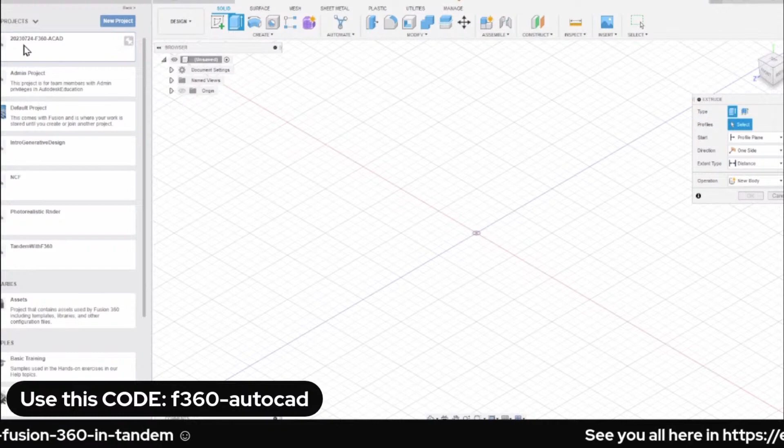So I want you to click on your data panel, this one that looks like a Rubik's Cube. So for me, I have gone ahead and created a new project, and I named this as the date today.

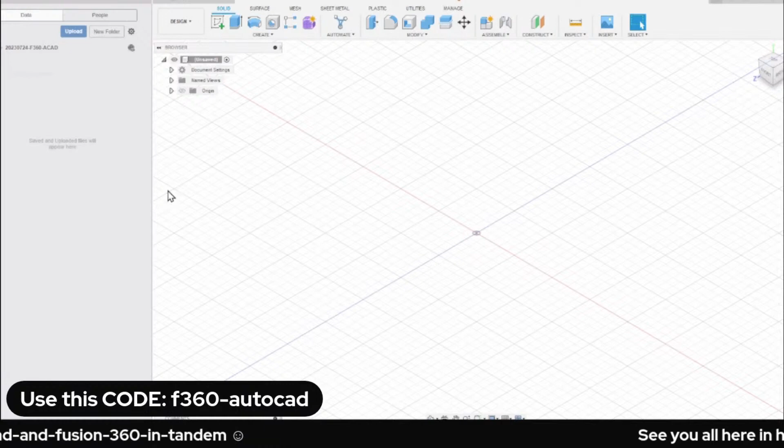Okay, and for the benefit of those who are absolute beginners, who would like to try out Fusion 360 and has the software right now running, so I'm going to minimize my data panel.

Okay, I want you to type in or key in, hit letter R. So what does it say? It's actually invoking the command which is rectangle. So right now it's currently selecting a plane or planar face. Yep, creating a sketch, definitely from James Estrada. We're about to create a sketch, Sir James.

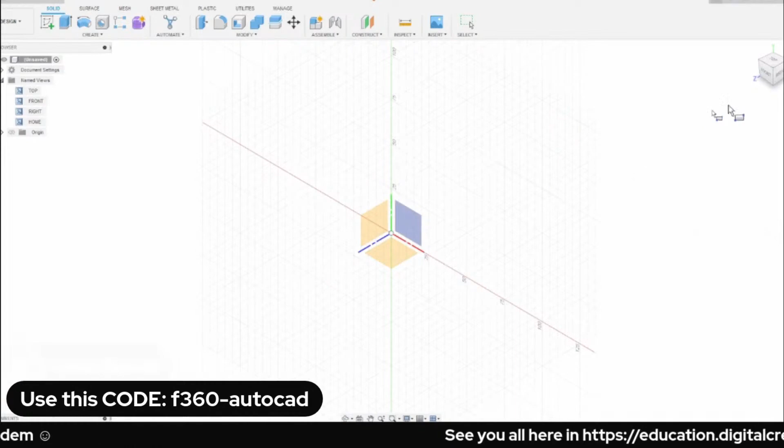So, yep, if you're familiar with the old school of doing stuff on paper, right? Consider this: in CAD, in Fusion 360, we are given three pieces of paper. And that paper is named as YX, XZ, and YZ.

So currently, besides my cursor, it is now asking what plane or planar face - in other words, it's asking us what paper do we want to draw into. So, as an example, we are prompted to select a paper, represented by YX, XZ, YZ. For me, I prefer scribbling or sketching on the XZ plane.

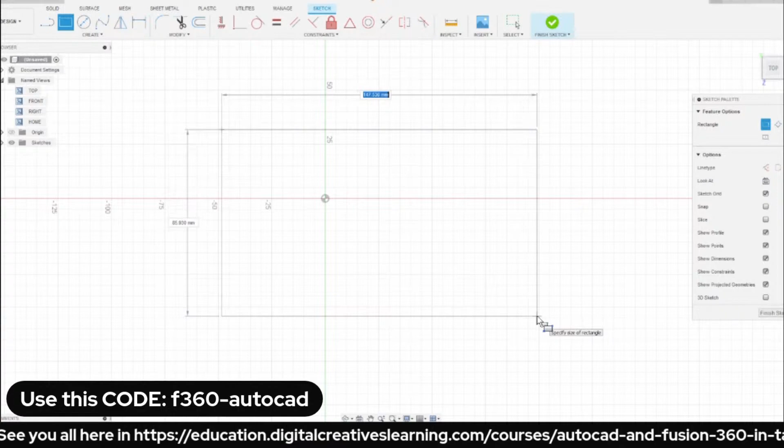And this time, we are prompted to place our first corner, right? Prompted to select or to place our first corner. So let me left click slowly. Again, this is just a recap for the benefit of those who are absolute beginners. Okay, so I just made a left click and I moved my cursor somewhere here on the lower right. I'm going to left click once more.

Hit escape to disable the rectangle command. So in AutoCAD, if you can recall, this looks like a hatched region. So again, this is also a closed boundary. So if I delete this horizontal line, notice the difference.

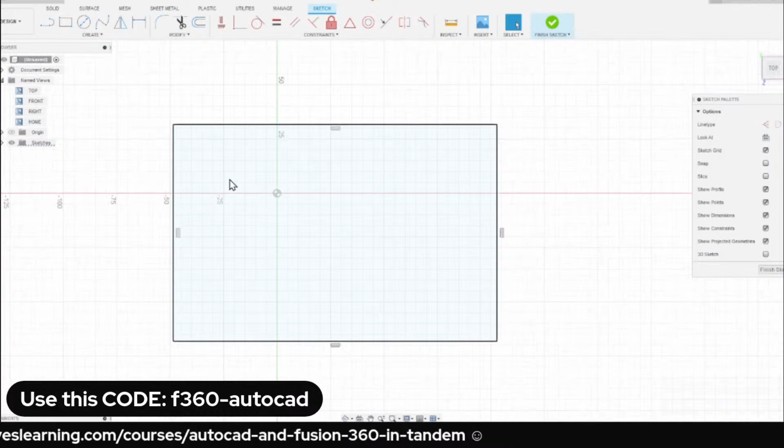Again, we're doing a recall of creating 3D objects in AutoCAD, but we're in Fusion 360. So in AutoCAD, recall that it is also converting, right? Before we can turn an entity, a closed entity, into 3D, recall in AutoCAD, we are converting it to a region, right? To a region.

So in Fusion 360, it's called a profile. So now I am launching AutoCAD as well. So again, in Fusion 360, it's called a profile. I now have a profile, and I can head over to this tiny house. A good indicator or visual cue that you're in sketch mode is you always have this green check mark, which is finish sketch.

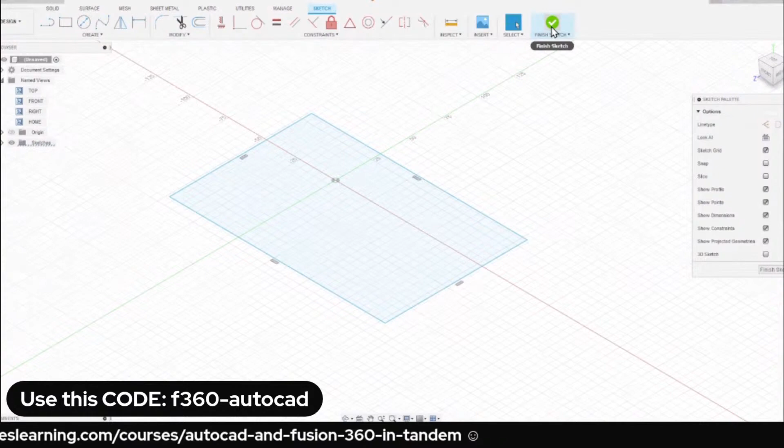So for this scenario, let's say we are done sketching. I'm going to click on Finish Sketch. And the difference with AutoCAD, notice below the command, the sketch we did is registered here in the timeline. It's also available on our browser, named Sketch 1. So I can turn off its visibility, turn off, turn on.

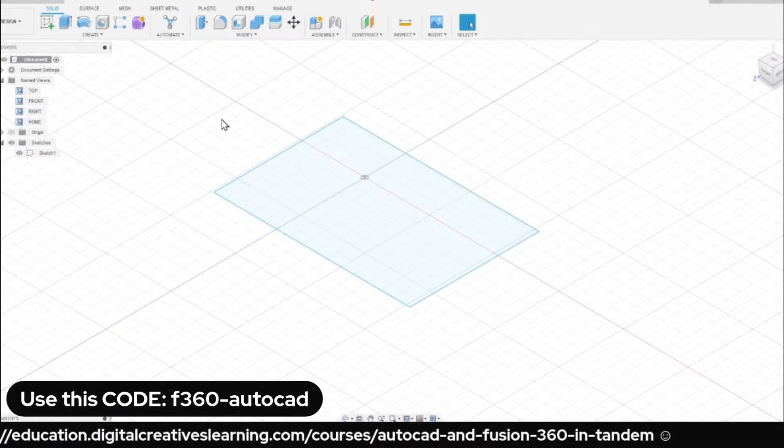Okay, so again, we now have a profile. So what can we do with the profile? We can turn this now into 3D. I want you to click on letter E. Hit letter E. The question is, what does letter E do? To our participants, what does E represent in Fusion 360? As mentioned by Sir Jose Maria Borlaza, it's extrude. So I'm now going to hit extrude, or I can head over to our ribbon under Solid.

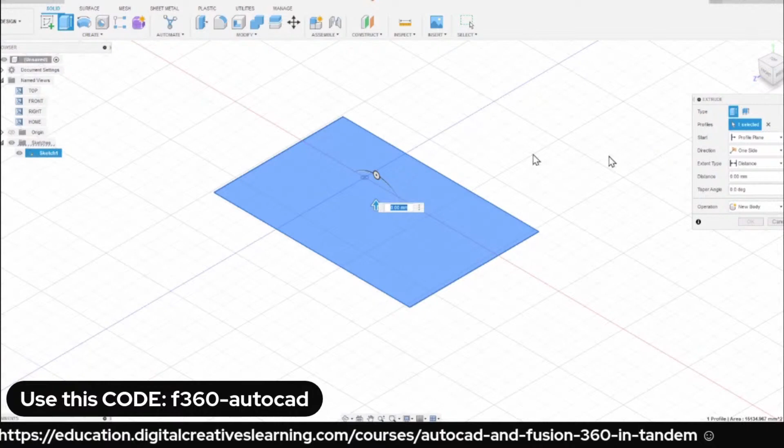Here's extrude. We are now prompted to select a profile, this one highlighted in blue. I have deselected that, so if yours is not yet selected, this is blank. I'm going to hover over this profile, left click. I now have one profile selected. I'm going to pull this up, making this now a 3D object.

Okay, selecting, okay. So the controls in Fusion 360 are the same as AutoCAD. If I hold my mouse wheel, I'm currently pressing it down, similar to AutoCAD, I'm doing a pan. Notice the change of my cursor, I'm now panning. And if I want to rotate or orbit this cube, it's simply holding Shift and holding my mouse wheel. Now I'm rotating the object.

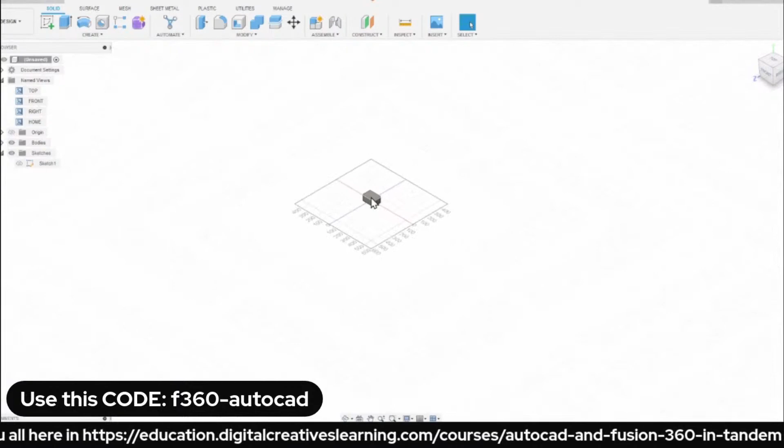If I want to go to the default isometric view, it's simply heading here on this tiny house icon. Same with rolling your scroll wheel, zooming out, zooming in, and if I zoom out and double click my mouse wheel, it goes to zoom extents. Again, same as AutoCAD. So yeah, as quick as that, we now have a 3D model, right?

So going back, let's begin opening up, like the majority of people utilizing AutoCAD mainly for 2D. 2D use, such as, notice here, I have an architecture title block, number 1.dwg. I'm going to open that in AutoCAD. So this is how it looks like.

Okay, so now I am showing you from our exercise files. I opened up Architecture Title Block 1.dwg. So again, it's utilizing AutoCAD files into Fusion 360.

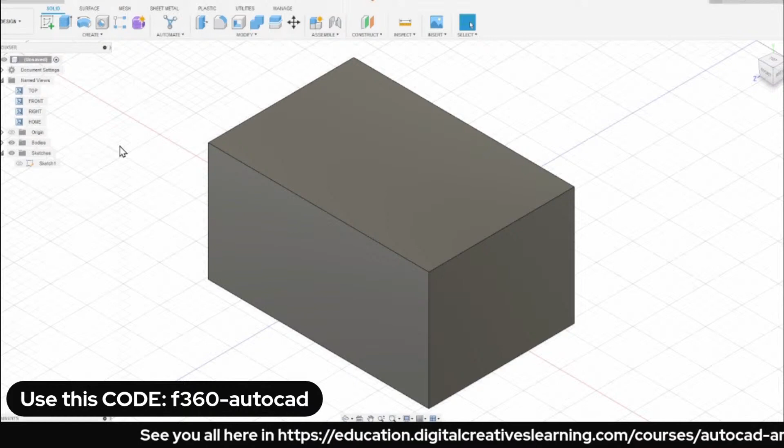With that in mind, before I head back to Fusion 360, I'm going to hover my cursor over here. Notice the location is now highlighted. I'm going to hit Control C. Once more, I have selected this path, Control C to copy. Then I'm going to open up, head back to Fusion 360. I'm going to click on Show Data Panel, the one that looks like a Rubik's Cube.

From here, I'm going to select Upload. I'm going to click Upload now. I can drag and drop, or I can hit Select Files. I'm going to hit Control V to paste that location. And I'm going to double left click, or simply click on Architecture Title Block 1, hit Open. But for me, I prefer double left clicking.

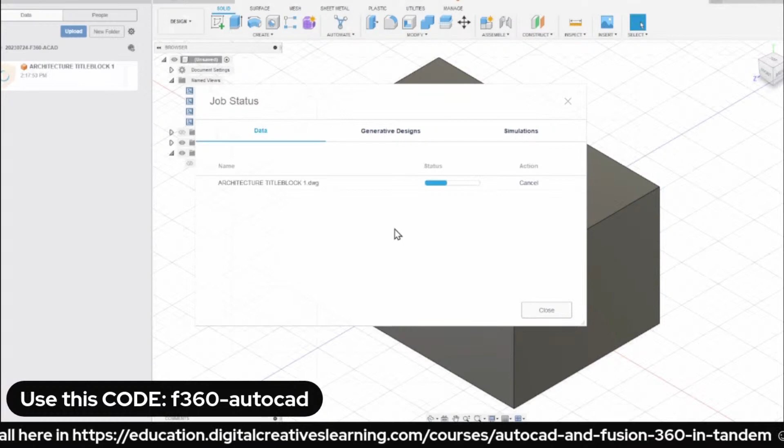We call it tick. Okay, and I'm going to select Upload. But of course, because I have created a project folder, notice the location, this may be different from yours. I'm now going to hit Upload. So it's now uploading, and from here we'll be seeing how Fusion 360 converts or interprets a .dwg file.

So it's now complete. Notice here, again, this is the file, the drawing file that we opened. Heading back to our data panel, I hope you're seeing Architecture Title Block 1. I'm going to right click, this time right click, and select Open. So it's now opening. So I actually opened another instance of Fusion 360.

While waiting for that file to be opened, the next step is I want you to open up Abyss Dining Sets by Co. So again, I have another instance of Fusion 360 open. I'm going to hit Upload, select that file, and that file is Abyss Dining Sets by Co. Tick, which means double click, tick. Okay, selecting Upload.

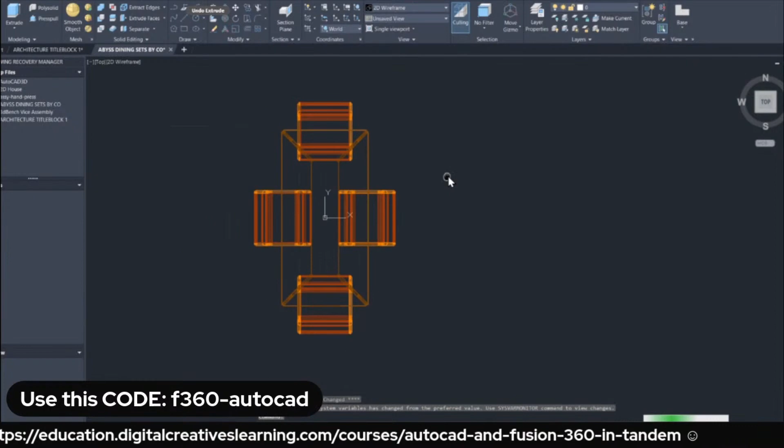Okay, I also opened that AutoCAD file in AutoCAD. That DWG file is also now opened in AutoCAD. So let me orbit this around, change the visual style to hidden, or how about conceptual? So yep, initially we opened up a 2D DWG file in AutoCAD. Right now I opened up, again, the file named Abyss Dining Sets by Co. So this one is a 3D object made in AutoCAD, and recall, I imported that into Fusion 360.

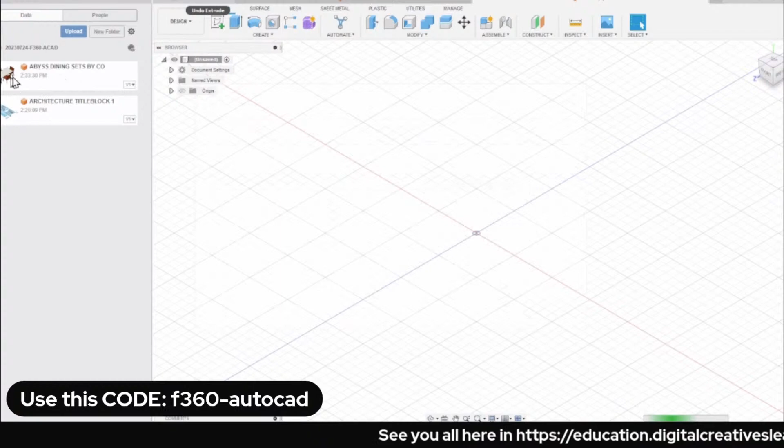I'm now going to hit close. Notice here on the left side, on our project panel, I can now see Abyss Dining Sets by Co. I'm going to right click now, select Open.

So now I simply minimized our data panel again, and from here you can now see how Fusion 360 translated and imported that AutoCAD file. So again, this is showing you that whatever you have made in AutoCAD is all reusable in Fusion 360. This is actually the goal of this live training, for you to appreciate how we can work with AutoCAD files in Fusion 360.

In addition to that, if I bring in a different file, notice here in Fusion 360 I can conduct simulation. I can do manufacturing, program this into CNC and have this manufactured. I can generate the tool path.

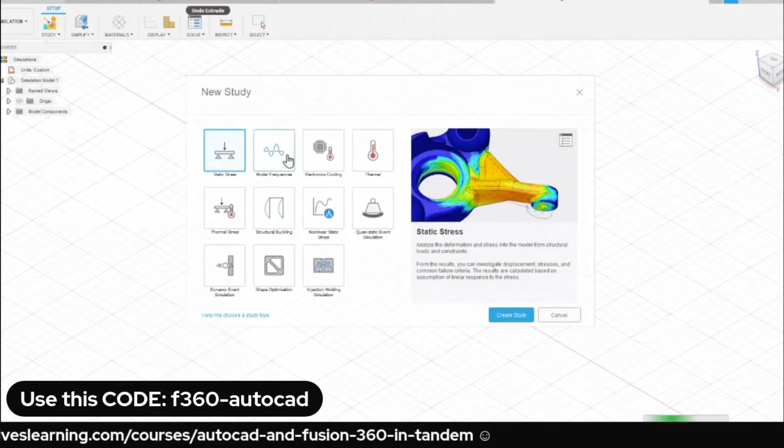So like for this one, for simulation, Fusion 360 is very, very powerful, unlike AutoCAD. Notice here, if that AutoCAD file was a beam, I can conduct a static stress analysis. I can do modal frequency. I can do electronics, cooling, thermals. I can do structural buckling, thermal stress. For those who were given access to Fusion 360 right now, I'm hoping you get to appreciate the power of this software.

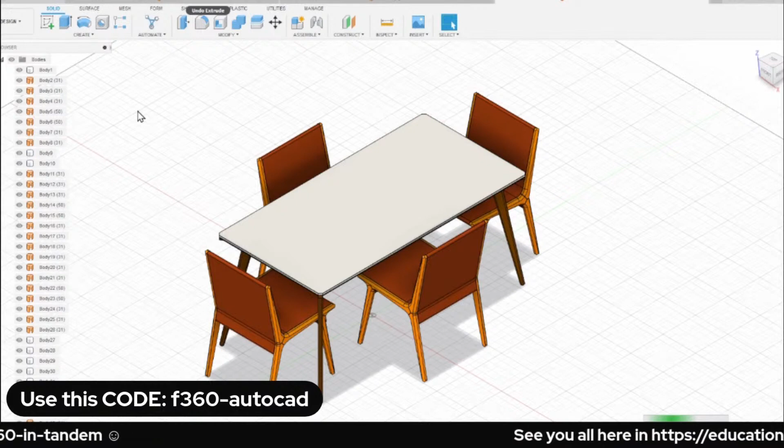So again, we now have that table and chairs in Fusion 360. Next step, I'm going to expand bodies. So informing you that this type of icon is a solid body, and this is a surface body. I hope everyone has downloaded and opened up this file, so feel free to tinker around.

Notice as well, in comparison to the cube that we created earlier, recall it has a timeline. When I say timeline, it is where the features, the commands, are registered. Like here, recall that after doing a sketch, we created an extrusion, so it's all registered here below on the timeline.

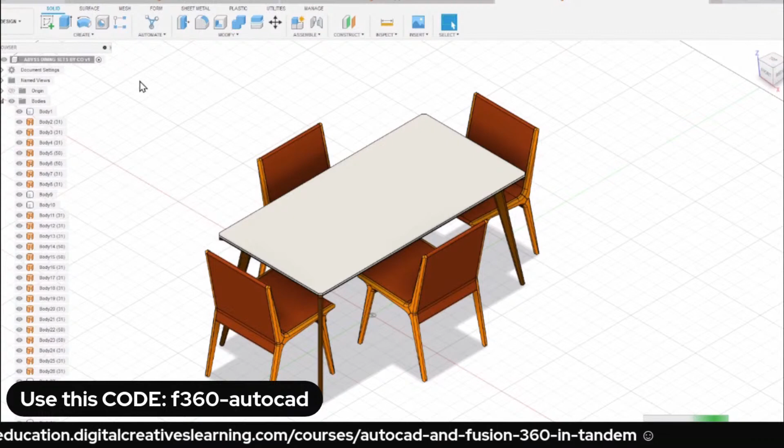So going back to the other instance of Fusion 360 with the Abyss table and chairs, notice here it's not available. And a good practice, please do, let me reiterate, keep this in mind: if you imported something and the timeline is not available, the next step would be heading over to our main file in the hierarchy. I'm going to right-click this and select Capture Design History.

So encouraging everyone, once more, with the Abyss Dining Set opened up in Fusion 360, I want you to head over to the main file, right-click, and select Capture Design History.

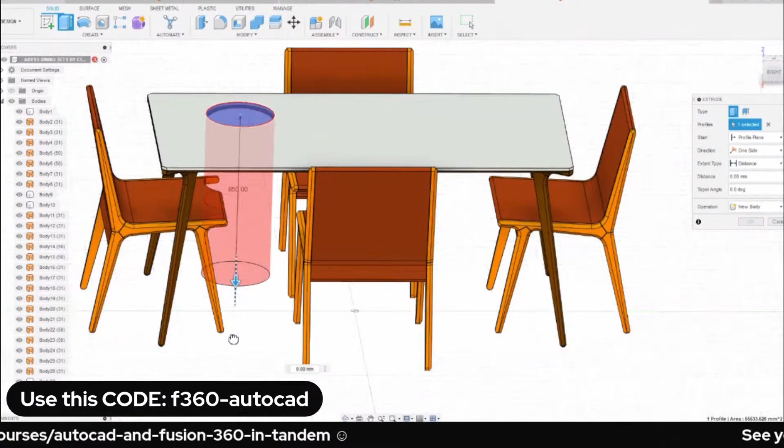So right now, if I create another hole, I'm going to sketch on this table's surface, hit E for extrude, selecting that profile, pulling this arrow down, selecting OK. Notice below, now the sketch and that extrusion command was captured. So I can quickly delete or undo this command by selecting them both, holding Control and left click, hitting delete on my keyboard.

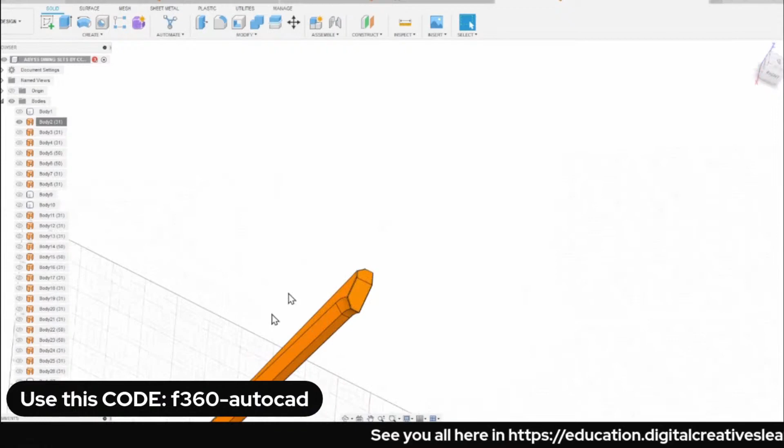In addition, we can isolate things. Like for this one, I can select the leg of this chair, which is body 231. I can right-click on this, head to the bottom, and select isolate. So again, this is a surface body. I can create a window selection, same as in AutoCAD, to select it all. Head over to surface, so let's check if stitching this up would make this into a solid body.

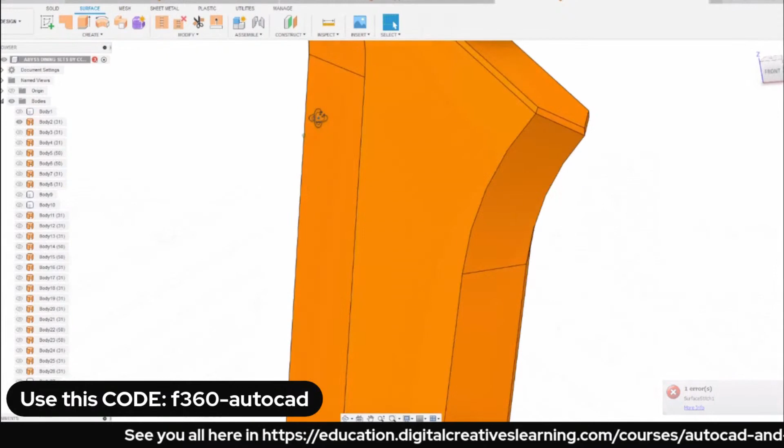So selecting stitch. It's looking nice, I'm seeing a green color. Take note, this is currently a surface, we're going to convert this hopefully into a body. Selecting OK. So the challenge here is it doesn't work. The challenge here is, of course, re-editing this surface, closing this up watertight for the stitch to convert this into a solid body.

So how about raising up the tolerance, let's say, to 0.2? Still doesn't work. How about 0.5? So I'm showing you some of the challenges when converting a surface body into a solid body. But of course, this is still reusable. So to enable the visibility of them all, I can right-click on the bodies folder and select Show All.

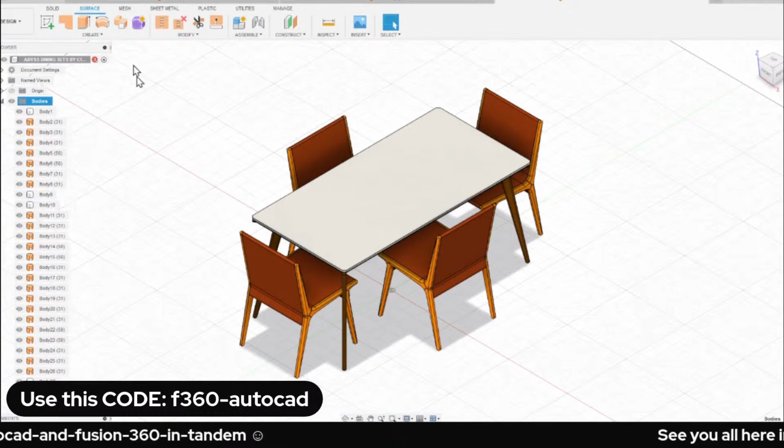Okay, another thing that we can do is I'm going to head over to Change Workspace. I want you to click on this dropdown and head over to Render.

Okay, this is one of the great advantages of Fusion 360. It has a very good render engine. We have the option to do a local render, or we can do a cloud render, which passes that computing power to the cloud.

So how about I hit A, which is the shortcut for appearance. And I'm going to head over to wood, so now we are about to customize the appearance of this object in Fusion 360. Let me try downloading mahogany or pine. How about pine? Let me download pine.

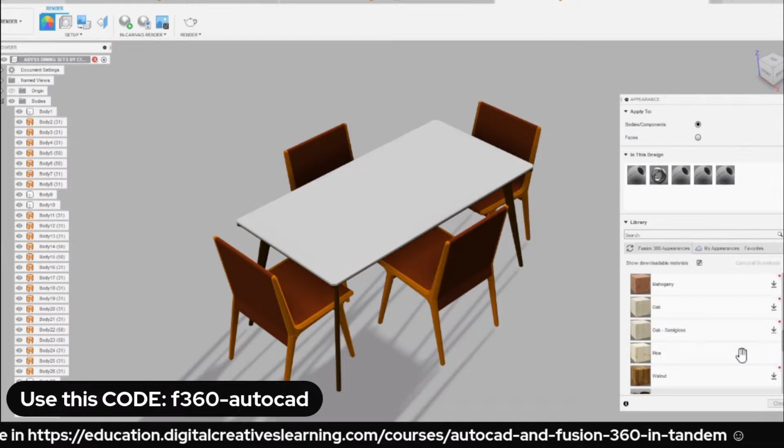Notice on the top it says apply to. We have two options: applying this into a body - again, this tabletop named as Body 1 - or we have the option to simply select a target face.

So let's check the difference. Let's say for faces, again letter A for appearance, enabling faces. I'm going to zoom in and drag and drop - left click and hold - and drop it on this surface, on this face.

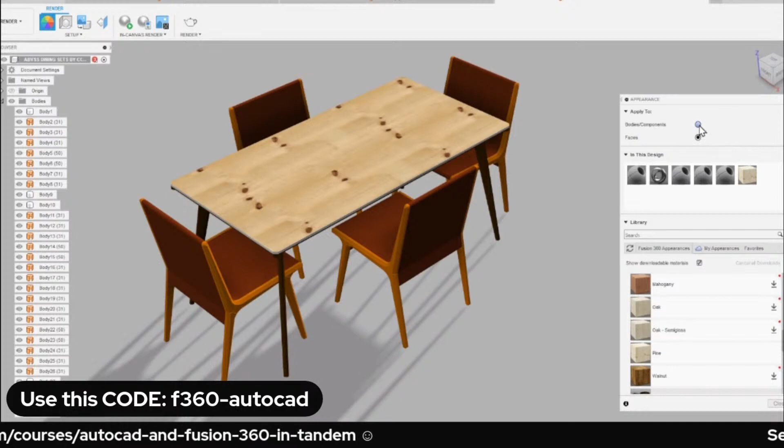Notice the difference - it was simply applied on this target face. So if we prefer having this on the whole body itself, I'm going to tick or enable bodies components, heading back to Pine, left click and hold, drag and drop over here, or heading over to our browser, dropping this to our Body 1, and selecting remove. If I zoom in, it's now applied to the whole body.

So in addition, of course, when you import and that results in tons of bodies or components, you can get organized by simply, let's say for Body 1, I can rename this - left click once more - let's name this as tabletop.

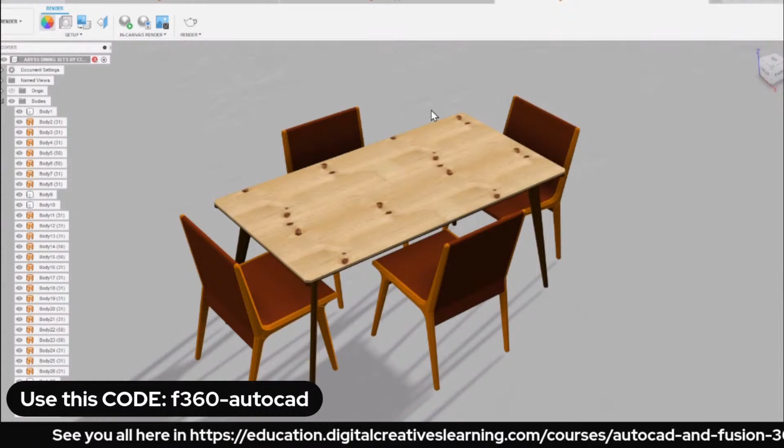Okay, I can head over to appearance once more, head over to in this design, Pine. I can right click on this, select edit. Let's say the scale is too much or too low. So notice here, I can adjust the settings, making this proportional. Selecting done.

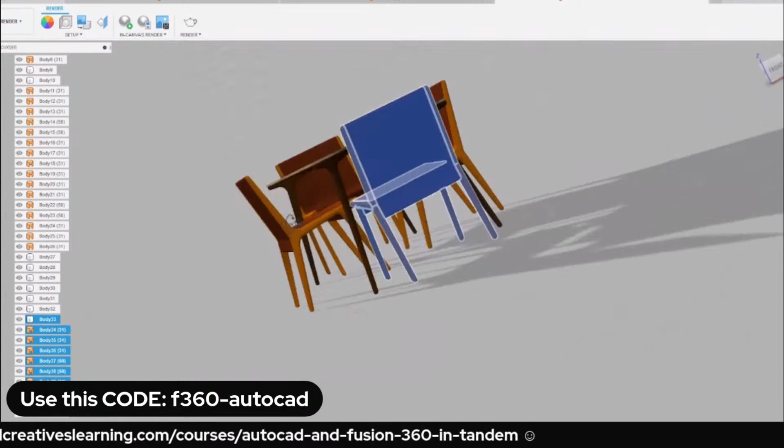Okay, so let's say, how about customizing the fabric of this chair. I'm going to select this face, right click, let's locate this on our browser. So this is a body - I am seeing up to here is the whole chair.

So with this bodies and surfaces selected, I can right click, let's isolate this, and how about customizing this chair's appearance. Heading over to our view cube, I can hit letter A for appearance - how about walnut? Let's try to change the appearance of this surface, which is in color orange.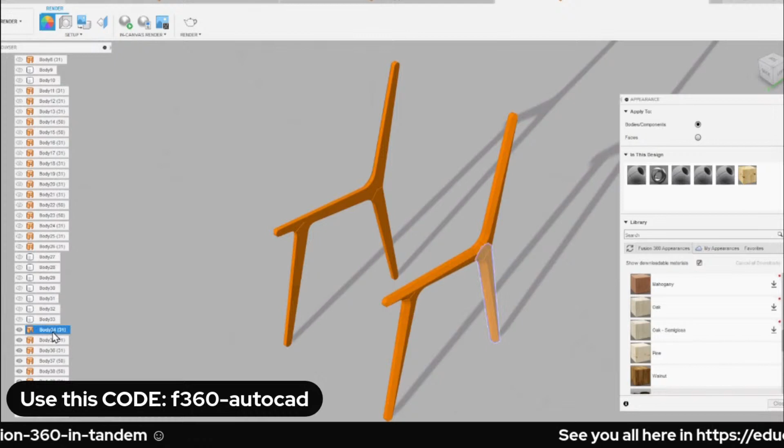Into a walnut type. So the body is - again, so this is the body. I'm going to turn off that body, hit A for appearance, and let's select all of this surface. Let's check what will happen if I change the appearance of a surface.

So drag and drop - of course, I can definitely drag and drop it individually on this surface, but right now I have all of this surface body selected. Drag and drop, left click and hold once more, I'm still holding my left mouse button, release. So it's now a walnut, but definitely darker.

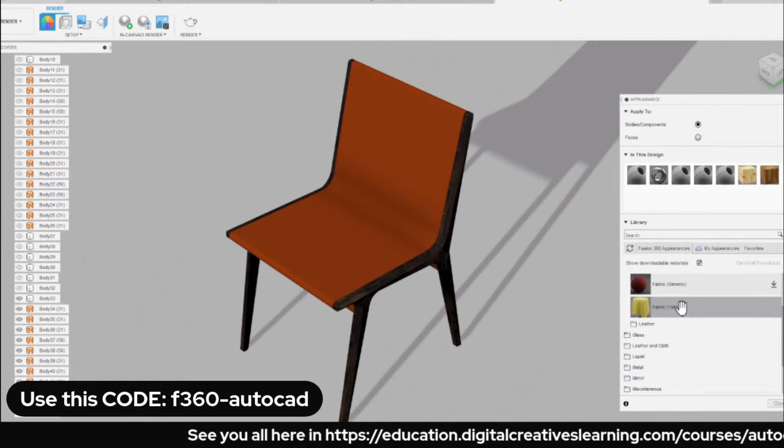So turning on Body 33, how about customizing this solid body? I can head over to fabric - oh yes, we have a fabric here. Let's say I prefer a yellow fabric. So that fabric downloaded, let's apply to - I'm going to enable bodies components, apply to Body 33. So there you go, we have now customized the appearance of this chair. Hitting close.

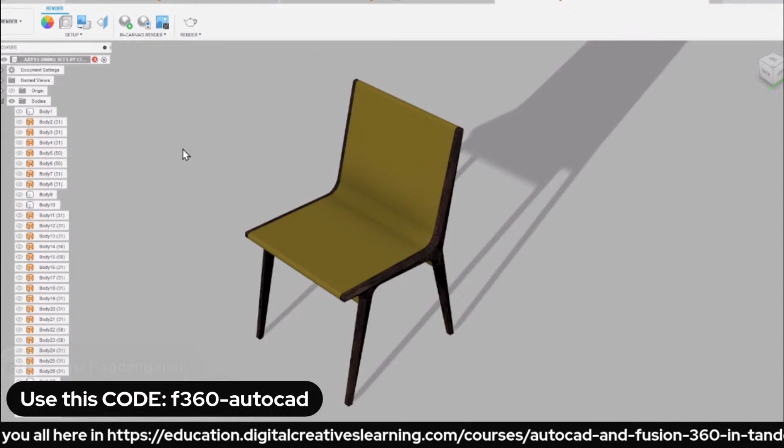Okay, heading back to bodies, or let us do a quick render of this chair. Let's now tinker around with the rendering capability of Fusion 360, and try to turn this chair into a realistic product render. So we have now customized the appearance - again, this all came from an AutoCAD file, a 3D AutoCAD file.

In addition to that, I can change the background. To do that, I'm going to Scene Settings, head over to Environment Library. Let's say I prefer a dry lake bed, so I'm going to left click and hold, drag and drop here on the blank canvas, and release. Notice the change of the scene.

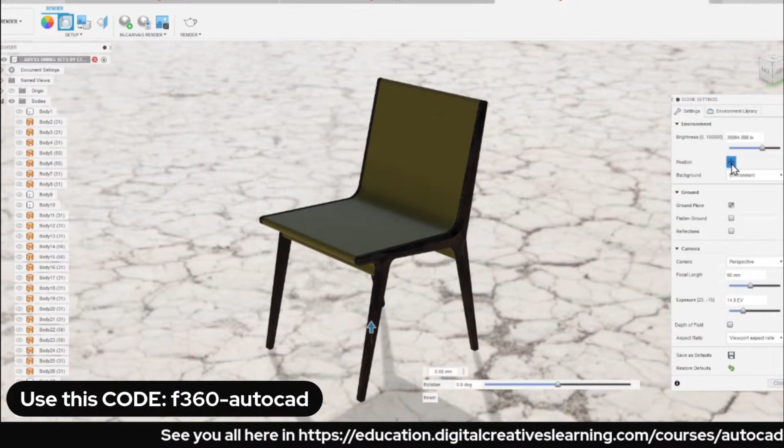To see that dry lake bed, we need to head back to Settings tab, under background, I want you to select environment. So this is the environment we're now in. In addition to that, I can change position, I can rotate so that the shadow goes over at somewhere around 140 degrees. So hitting close.

Of course, definitely we can scale up as well the ground. So I'm going to head back to scene settings, select position once more. I can do a reset, I can also flatten the ground, and by flattening the ground we can now rescale it, make it much smaller. How about this type? This looks more proportional. I'm going to hit close.

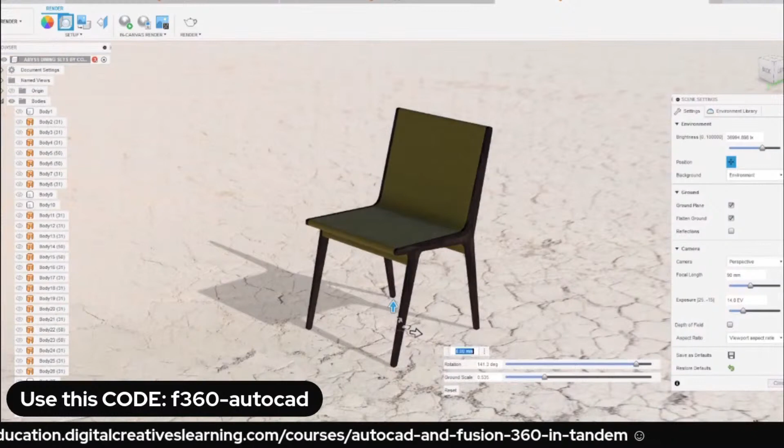Okay, and from here again, you have the opportunity to do a cloud render. For cloud rendering, it uses cloud credits - now for me I have around 100,000, but if you have consumed such cloud credits, you can purchase it again from Autodesk. Okay, so I think I have a good machine, I prefer doing the local render. So let's click on in-canvas render.

Notice below on the lower right, I can select this indicator or slider. I can move this to final or do an infinite render. Let's do an infinite render, and from here my machine is now working its way through the computations, the bounces of the photons.

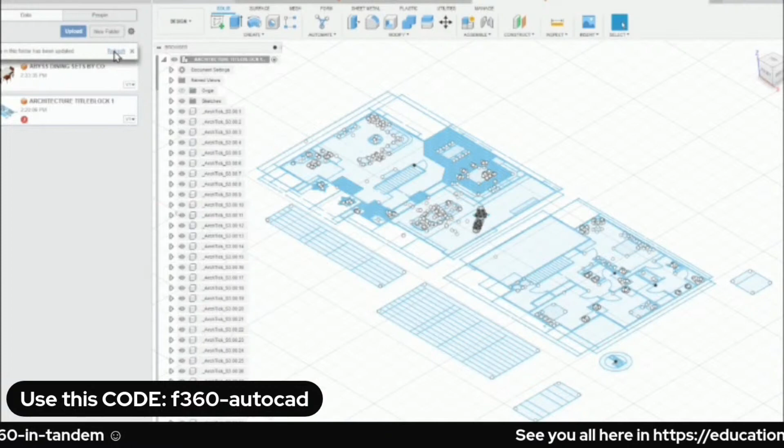I headed back to our first instance of Fusion 360, where we opened up a 2D drawing. I'm going to close our data panel. So this is the output, the outcome, the interpretation of this AutoCAD file in Fusion 360.

So from here, notice about going into this area. Notice here we're seeing profiles. Again, when we say profile, definitely we can do an extrusion, right?

So from here, as an example, but before we do such extrusion, I'll head back to our main file. I'm going to right click here and select Capture Design History.

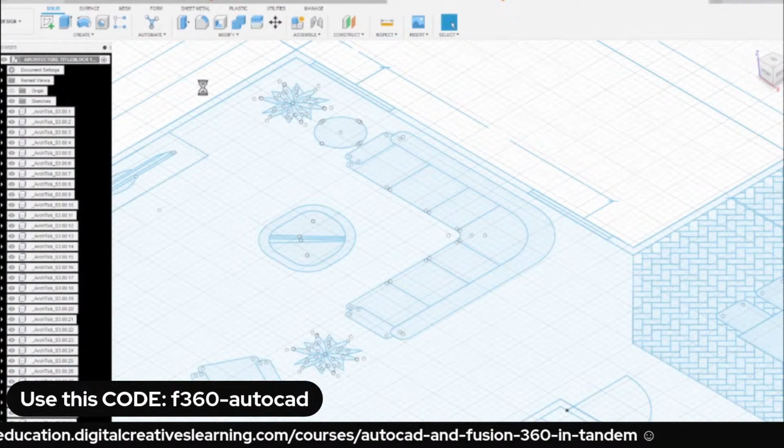Okay, while waiting for that, let's head back to our render.

So from this scene, the realization on this exercise file is definitely that this is a large file. But of course, you may probably have your own simple 2D AutoCAD file, 2D drawing.

Okay, going back to our render, of course, you have the option to quickly save this or wait until it goes final. So let's not wait, but of course we will get back on this design. For now, let's capture this.

Let's download this image. I'm going to select Capture Image. Okay, the resolution would be the whole window size. I'm going to hit OK. And I have options.

I'm going to save this locally as well, so I'm going to copy my target location. It's on the exercise files. Under save to my computer, it's currently ticked. Heading over to this locate or ellipsis, Control V. I'm going to agree with this default file name, selecting save.

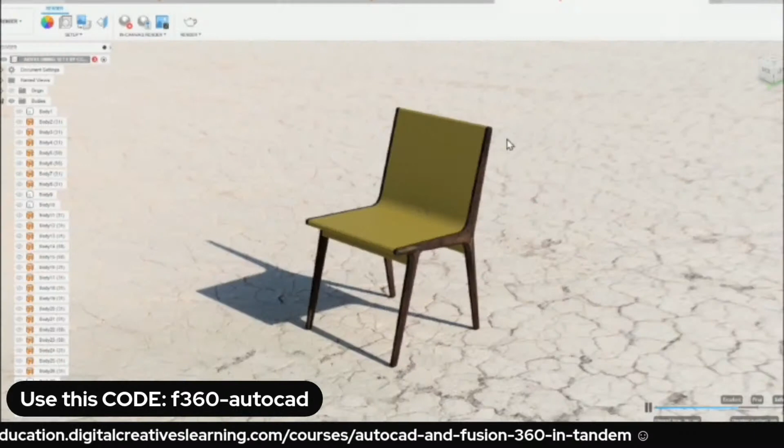So going back, I'm going to head over to our data panel. Notice I have resized that window. Because I accidentally resized that window, the render was reset.

So it's again starting, going back. So it goes back, re-rendering this whole scene.

Okay, moving forward, let's discover another way of working with AutoCAD 3D files. I'm going to hit upload, select files, and this time we're going to select the 3D bench vice assembly.

Okay, double left click and select upload. So we now have the 3D bench vice assembly dwg opened.

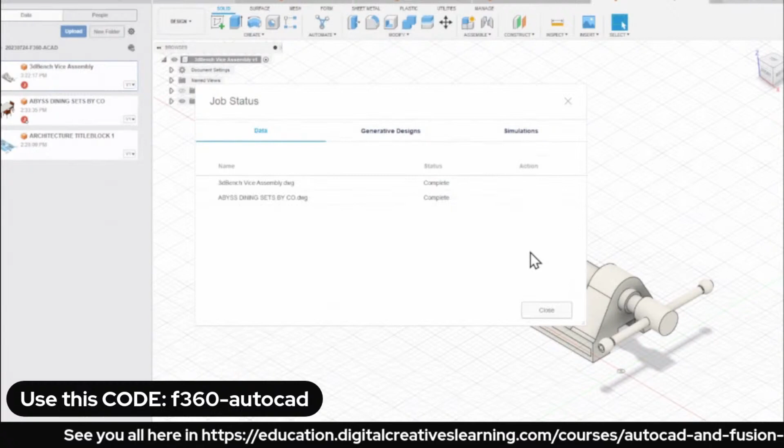Okay, so I'm now going to hit close. This is that AutoCAD 3D file opened up in Fusion 360, and let me show you how it looks in AutoCAD. Changing the visual style to conceptual. Okay, so this is what we are currently working on or about to work on.

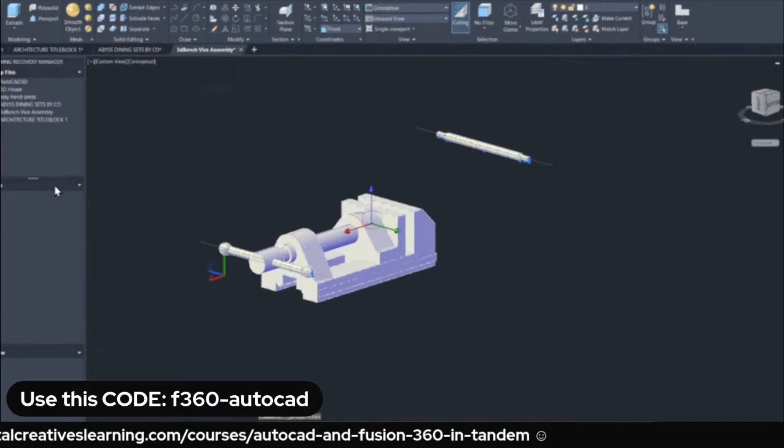And if I can do a properties, we actually have three solid bodies here in this AutoCAD file. Okay, so this would be your final exam to get a hold of that course completion certificate.

So again, the first thing we have to do is recall the importance of having the timeline, or the actions that we did, recorded. So again, right-clicking on that upper or main hierarchy, selecting Capture Design History. So if I twirl this down, same as what we have seen in AutoCAD with those bodies, I have 1, 2, 3, 4, 5, 6 solid bodies.

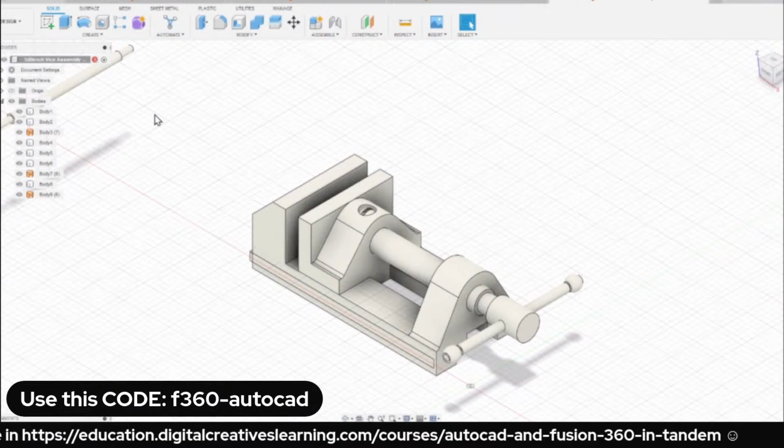Okay, so the goal in this part of our training is to turn this into a dynamic assembly. We have to see how it looks like when making such parts move and how it affects the other parts.

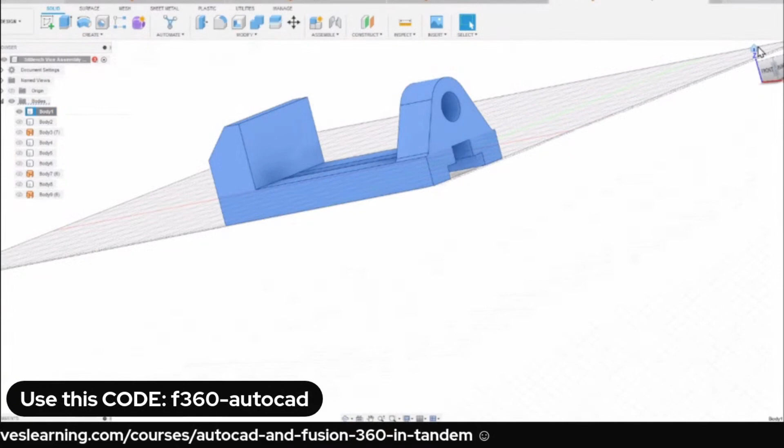So a good tip when importing components or bodies into Fusion 360 for an assembly is to locate what is supposed to be the parent component. From what I am seeing here, this is body 1. Let me isolate this. I prefer this one should be resting on these two plates.

And that two plates, I'm going to select this face, right click, find in browser. Oh, I'm sorry, that two plates is body 4 and body 5. So make it a habit to identify the parent component.

Because what we're about to do is to remove the degrees of freedom of certain parts or components. So this is currently a body. Now for us to have this as an assembly, we have to convert this body into a component. In some other softwares it's called parts - to those familiar with SolidWorks, I think it's called SLDPRT, that's a part. In Fusion 360, it's called a component.

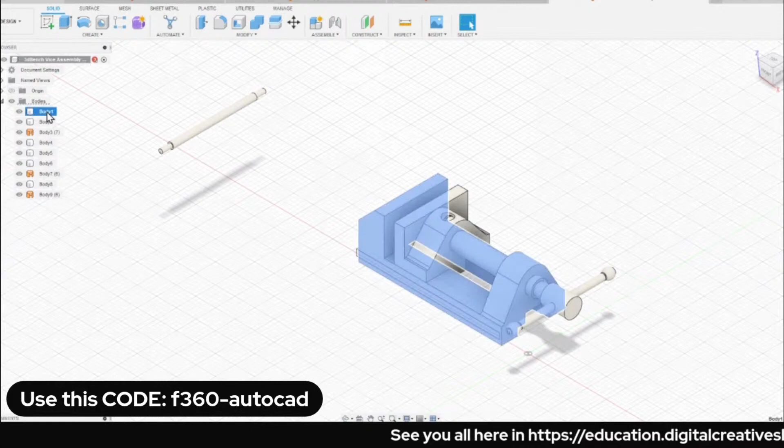So I'm going to select body 1, holding shift, body 9, to select all of these bodies. I'm going to right click and create components from bodies.

So if this is now a component, a part, this is now free moving. I'm currently moving or tinkering with component 3.

Okay, so let's relocate that parent assembly. I consider this as the parent components, which is 7 and 8. Or we can also consider this component 1 as the parent component itself. So it depends on you - I think it's much better if we have component 1 as the parent.

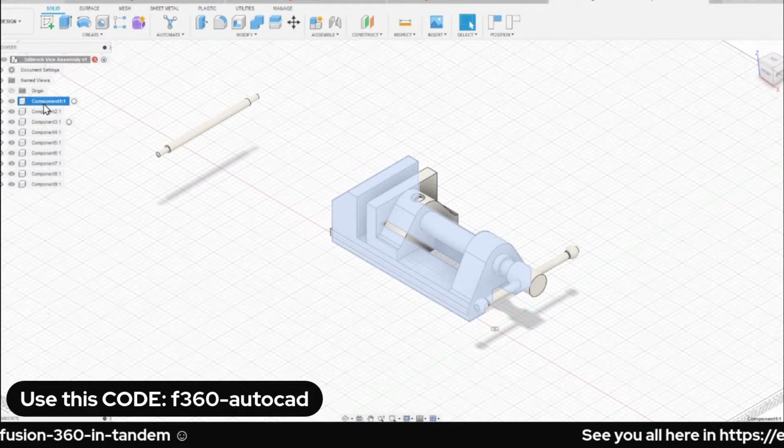So I'm going to hit component 1, right click, and select ground. When we say ground, it's removing its degrees of freedom, so I'm not able to move this body anymore. Notice, once grounded, I can still move these other parts - moving them out.

So again, what we're seeing here is an AutoCAD 3D file imported into Fusion 360.

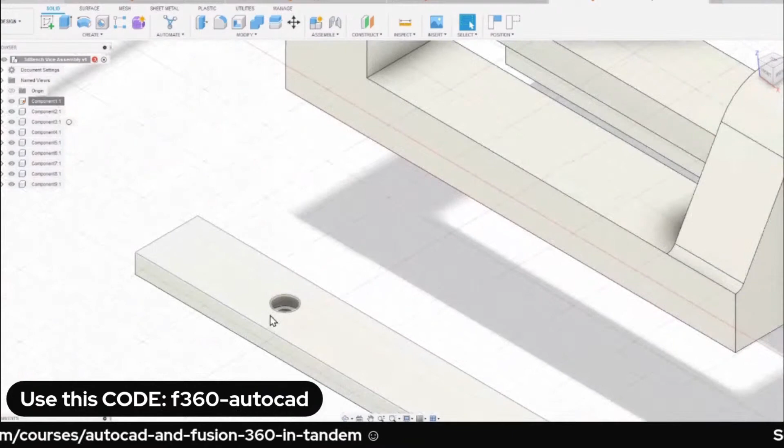So the first thing I am seeing is, let's say we have to assemble this going inside, or the face of this plate going to this face of this vise. So I'm seeing if there's a hole there, it may probably be secured rigidly by a screw. So I'm going up, selecting assemble, selecting joint. And I'm seeing a countersink or a screw with a head.

So with that, we can also rotate this component - this is component 7. I'm going to hit M for move, select this rotate handle, selecting OK. I can right click once more and repeat that move copy command, selecting this component. Okay, let's rotate this. Selecting OK.

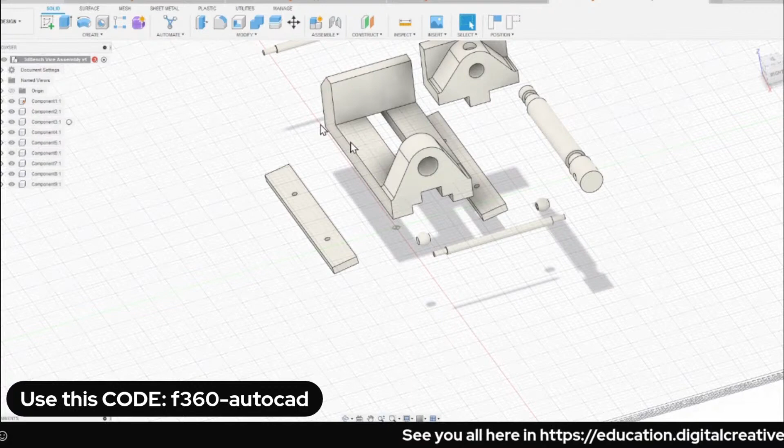And now let's apply joints, hitting J for joint, heading over to the motion tab. So what I'm seeing here, it is possibly a rigid joint because there's going to be a screw here that will also go there. And next we have to define the target motion, which is rigid.

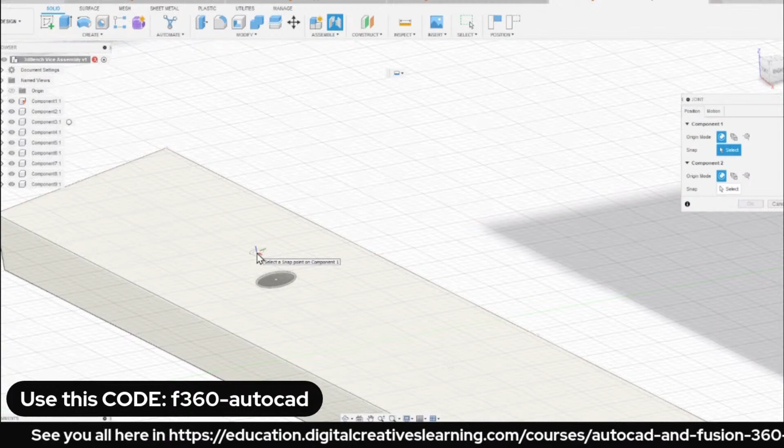I'm going to head over to position. Notice here there's this disc shape which is also being represented by an axis - we have the Z there in blue, the green, and the X in red. So this is the snap point. Now this plays an important role because when we define what the snap point is, it will mate with that other snap point.

So to understand this more, I'm going to define our joint origin snap point, otherwise called joint origin. Notice if I hover over here, we're highlighting the cylindrical face. If I hold control, notice, and move my cursor out, it means that we are locked on this face. But if I release my control key, I can now hover over and highlight other faces where my cursor is. So my target here is this face. I'm going to hold control and left click.

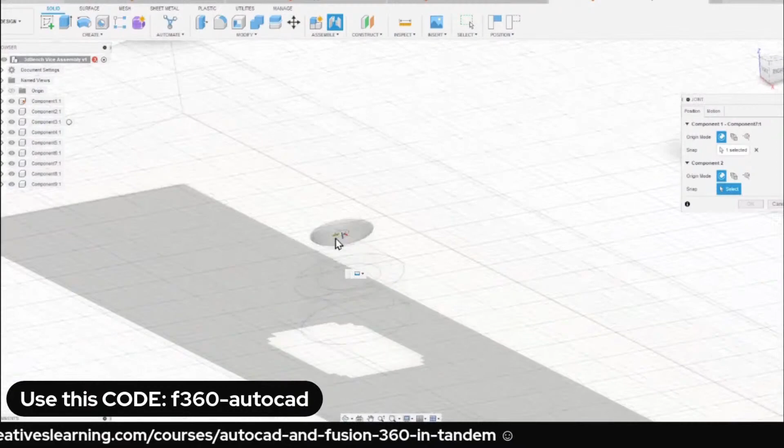So joint origin defined. I will go back to this component, rotate this, and select this joint origin. Notice what will happen - the joint origin from our first component will mate with this joint origin of component 2. So I'm now going to hit left click. Okay, so it goes in there. Selecting OK. If I hover over this face and try to move, of course, because it's rigid, rigid is same as being grounded.

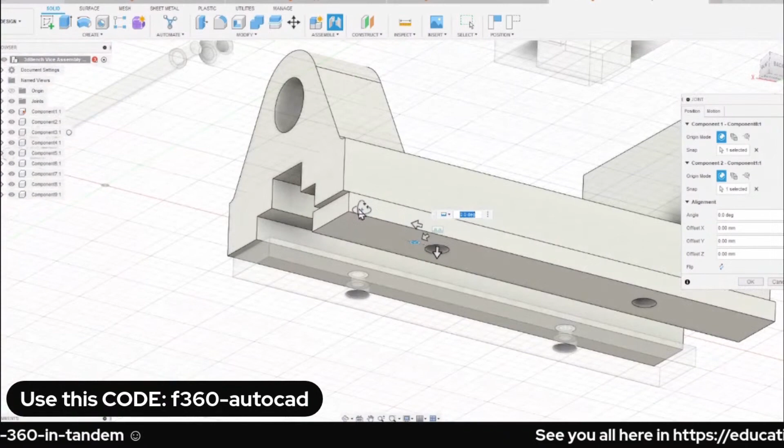Next, how about this one? Let's try defining the joint origin here, hitting J, the shortcut for Assemble, Joint. So left click that joint origin and left click on that joint origin. Selecting OK.

Next, of course, definitely this shaft should go in here, right? So the appropriate joint for that - let me ask our participants, what do you think is the appropriate motion type for this shaft to go in here? Is it rigid? Is it revolute? Is it slide? Is it cylindrical? Is it pin slot? Is it planar? Is it ball? What do you think?

Yeah, asking our participants, revolute? Yes, it's also possible, revolute.

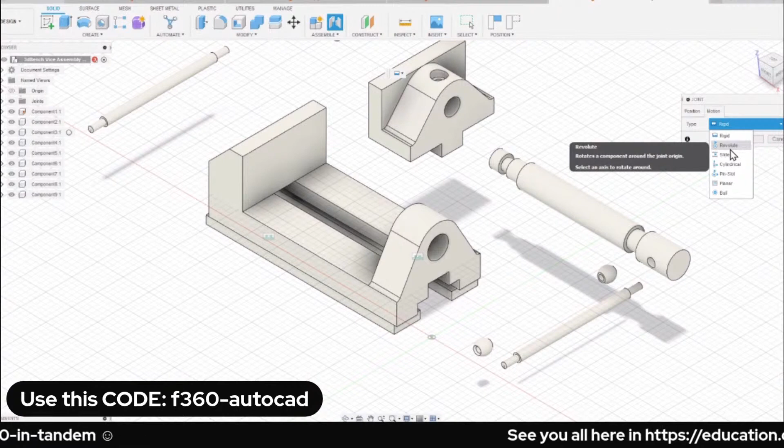So if we insert this, let's say this is a shaft, insert this, of course definitely it will revolve, it will spin, but there's another set of motion with respect to the x-axis. It will move back and forth, right? So it's not only revolute.

So it will not only be having a revolute, but it will also have a linear action with respect to the x-axis. So the appropriate joint for that is actually cylindrical. It gives the opportunity to rotate, to revolve, and to move back and forth.

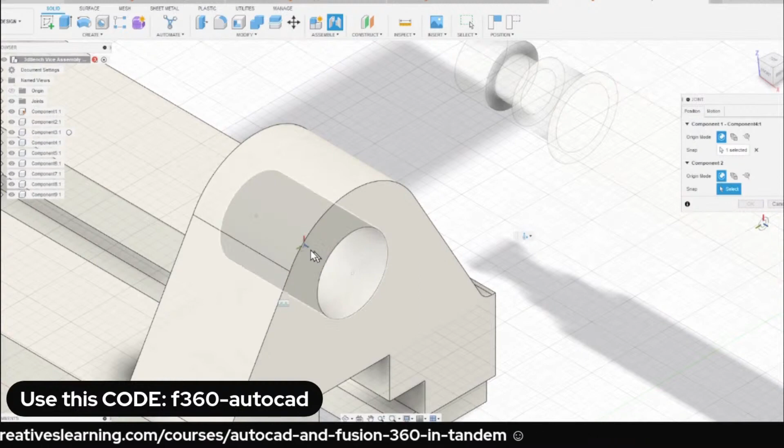So having the type as cylindrical, getting over to position, I prefer any of these joint origins will do, but I prefer this joint origin over here. Left click, heading over to this face, holding control just to lock it on this cylindrical face, and left click.

Selecting OK. Notice, yep, I can spin this around and move this back and forth. So we're now creating a dynamic assembly. Can you do that in AutoCAD? The question is, can you do that too in AutoCAD? It's different here.

There's tons of things that we can do with an AutoCAD file imported into Fusion 360. We can do motion study, we can assign or drive joints, we can do motion links. So moving back, we have now inserted the shaft or rod into that hole. So this as well is our next target.

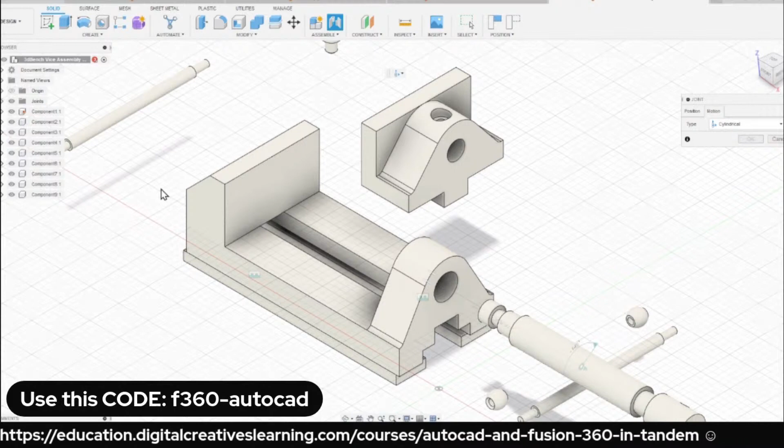Okay, so what do you think, guys? What should be the appropriate motion for this component to go over to this component? Another question, what do you think should be the appropriate motion for this component to go over here?

Yes, Sir James is correct, linear with respect to the shaft. So for that linear motion, it's actually called slider in Fusion 360. So with slider, I will go over on this edge.

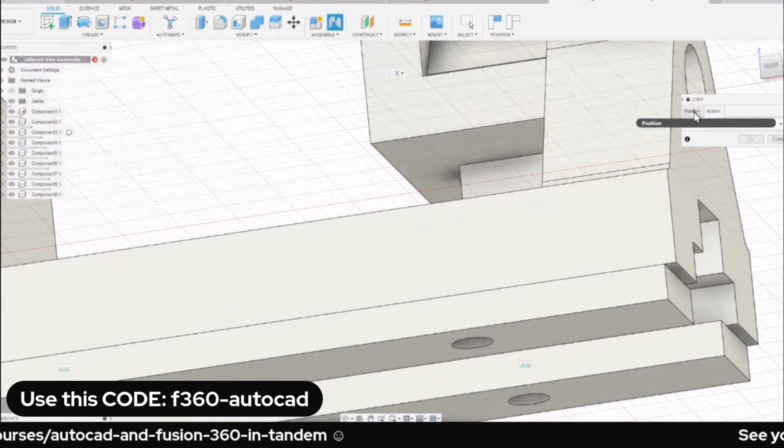But of course, heading over to position tab, again take note of the joint origin or this disk's position. So I'm going to head over to that edge.

If these other components are bothering my view, this is component 9 and component 1. I have selected them both, right click, and I'm going to isolate them both, for me to have a clearer view.

Hitting J, motion type slider. Again heading back to position, so notice the position of that joint origin. The red axis, x-axis pointing up, the green pointing to the right.

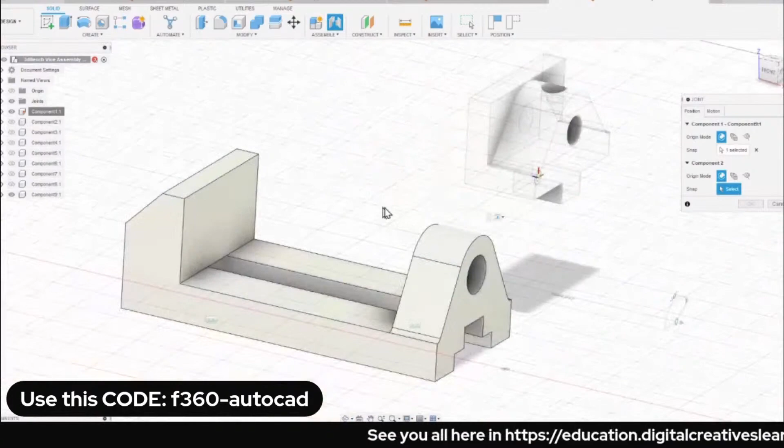Okay, so with that I'm going to the other component. Here, notice again the orientation of our joint origin. Left click, and hit OK. So now we're having a linear motion like what Sir James Estrada mentioned earlier.

Okay, going back, heading to 3dBench Vice Assembly. Let's show all components.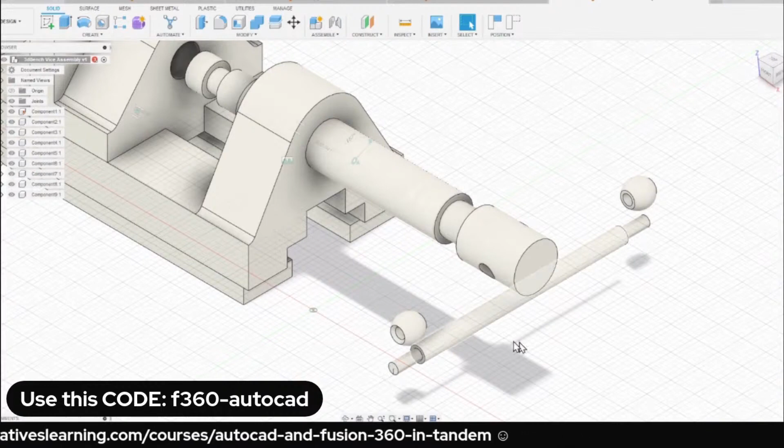Next step, how about having this rod be inserted on this hole? Again, it's the same, hitting J. Motion type for that would be cylindrical.

Heading to position, selecting this joint origin, heading over to this cylindrical face, holding control just to lock on this face, and selecting this joint origin. Selecting OK.

So hoping you are following along because this would be our final exam. I want you to recreate what I did. So next step is to have these end pieces.

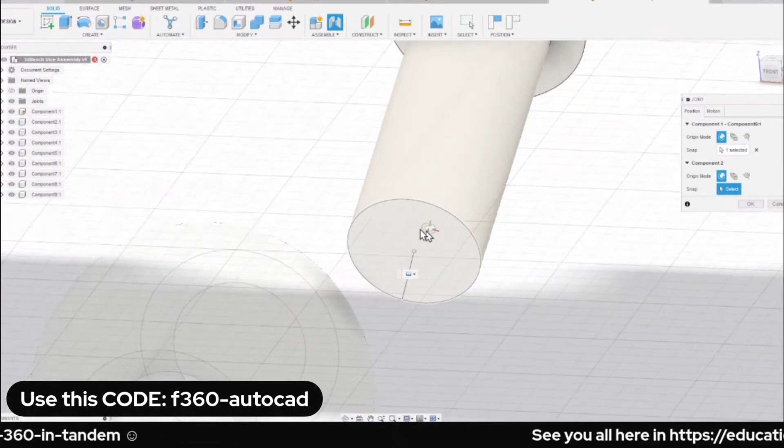Let me hit J, I think the appropriate one for this is rigid. Heading back to position again, hover over this edge, hold control, selecting this joint origin, and hovering over this face, holding control just to make sure, and selecting this joint origin. Left click.

Selecting OK. Let's check. Yep, looks nice, I can now rotate this.

Yep, in addition, for demonstration purposes, I can also, let's say, go to front view. Right, so I think this face should be mated with this face. So the appropriate motion type for this one, I think, would be revolute.

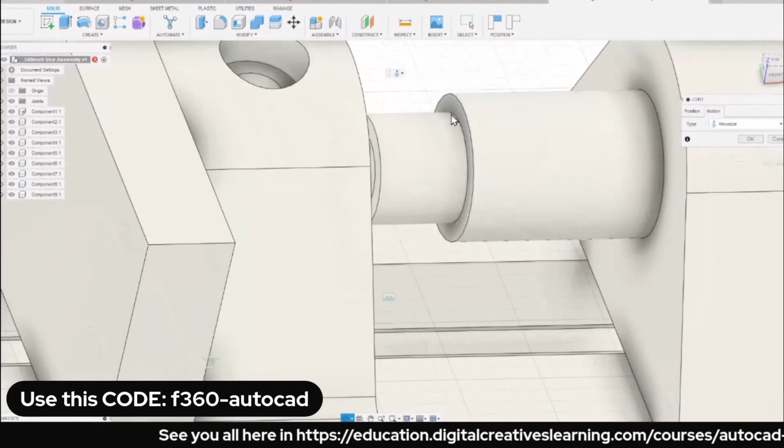Okay, so hovering over, heading back to position, this face, holding control, selecting this joint origin, and hovering over this face, selecting that joint origin.

So I'm seeing a conflict. If that happens, we can go into wireframe view. So what I did, I pressed Control 7, Control 6. It's actually under visual style: shaded with visible edges only, and wireframe.

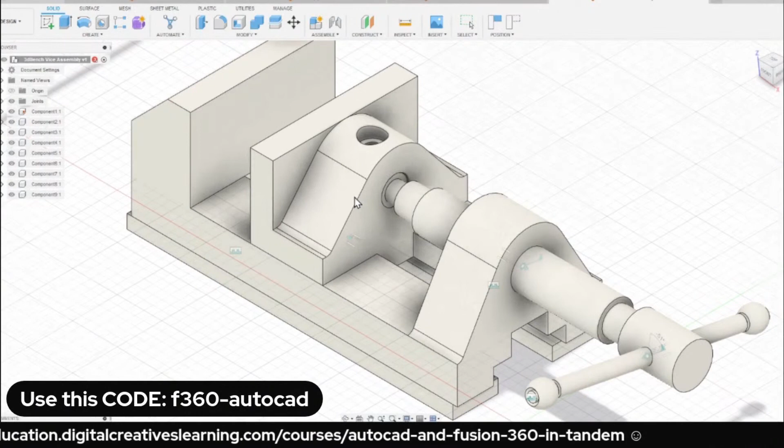So we're having a conflict there. Of course, in the real world, this would turn and push this component. Right now, if I'm moving this, I'm going way past, beyond the other components. To actually simulate the realistic condition, if I push this to the left, I should be pushing this as well, and this will slam into this face.

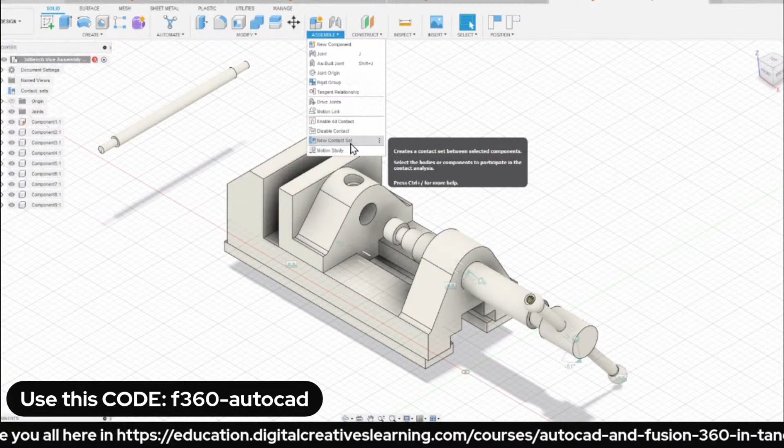To do that, heading over to Assemble, enable contact sets once more, and I selected enable contact set. Again, enable contact set. Let me hit undo. Assemble, enable contact set. Notice if I head back again under Assemble, I now have a new contact set. Giving you a few seconds to do what I just did.

We're about to finish this afternoon class session.

Let me play around now with our Abyss dining set. I'm going to insert the bench vise assembly into this table, on top of this table. I'm going to right click, insert. This time it's using insert into current design.

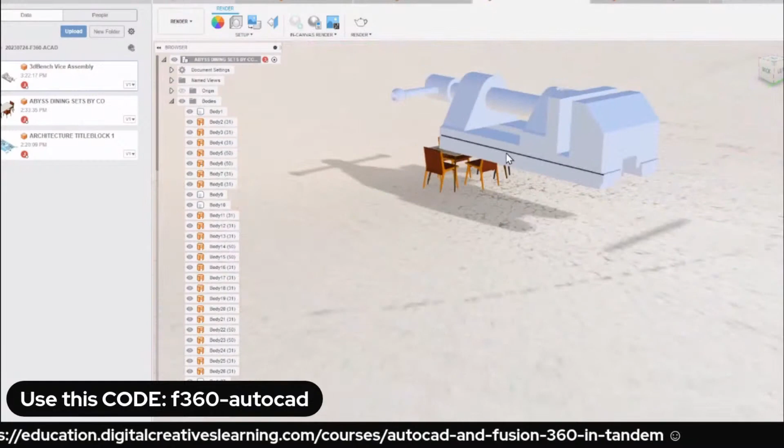And for me to place this, we have to resize. And kapareho niyan, recall I forgot to set capture design history. So let me head back to design. Right click. It already has actually pala.

Going back to our data panel. Right click, insert into current design. Now I want that vice assembly on top of our table. Selecting OK, and I want this turned off. So yeah, this is the assembly. This is actually body 9, so turning that off.

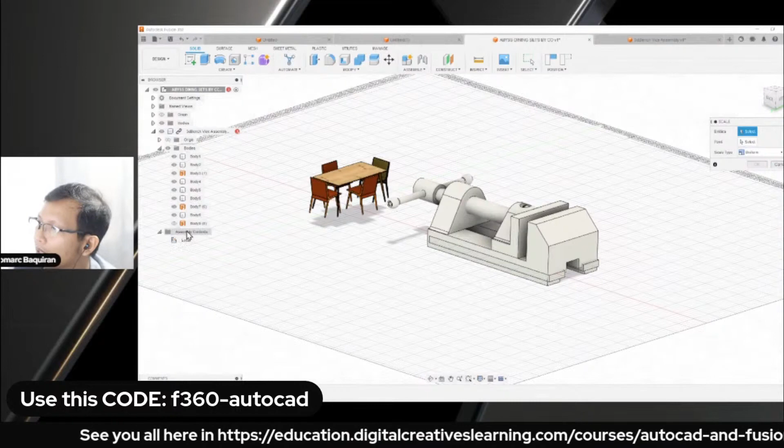Okay, again, SC scale. Or, I think I have to unlink. Right click. Yep, we can break that link.

Because having the link turned on means whatever update I did to this one, let's say I'm going to hit letter A, and let's change the color of some of our components. Let's say this one, I want this to be red, this to be green. How about this to be blue? So close, hitting Control S for save.

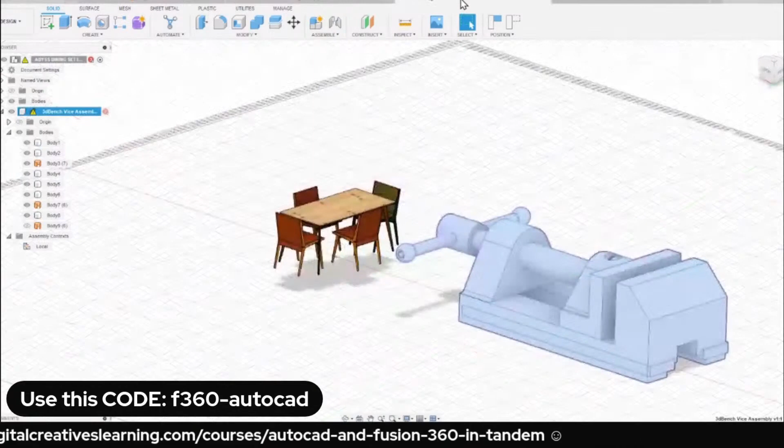Notice if I head back to Abyss dining set, I have a prompt telling me there's a latest milestone or version. Simply clicking on this one, so this should be the color of this. Ayan, so now it's reflecting.

And from here as well, of course, we can break that link. I'm going to right click on our bench vise, break link. Simply select capture position para ma-retain natin yung position niya.

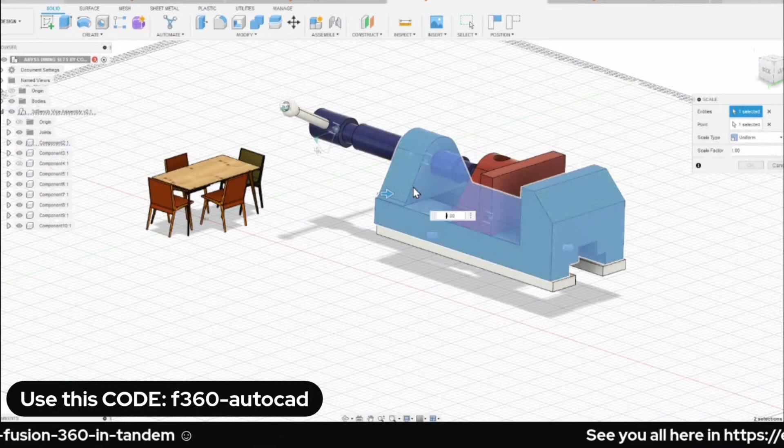Again, SSC. Parang isa-isa ata to for us to rescale this. Let me activate this, SSC. Ayan, so I made a window selection. So confirmed, window selection. Palitin pa natin, how about 0.1?

Oh, let's say it's 0.1.

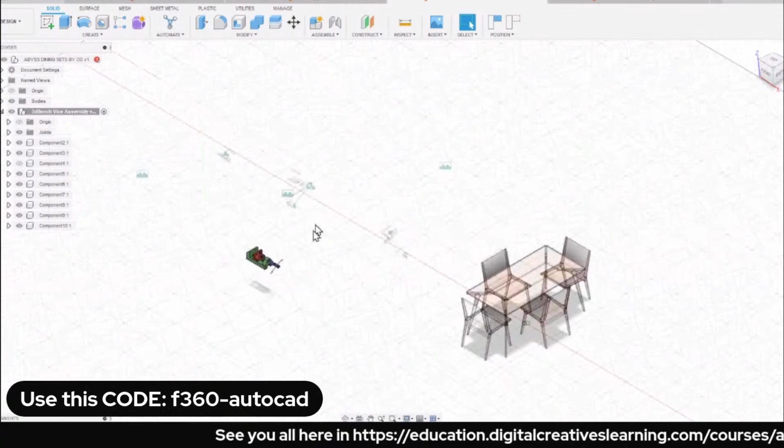Okay, so I'm going to activate the assembly. Whenever you make changes specifically to a component, you have to activate it. Just a reminder for those who would like to utilize assembly in Fusion 360.

So let's now put this on top of the table. Hitting J, motion type definitely would be planar, right? Selecting any of this joint origins, I prefer this one. Going to our tabletop. Oh, how about this? Selecting this joint origin. Selecting OK. It's now on top of that table.

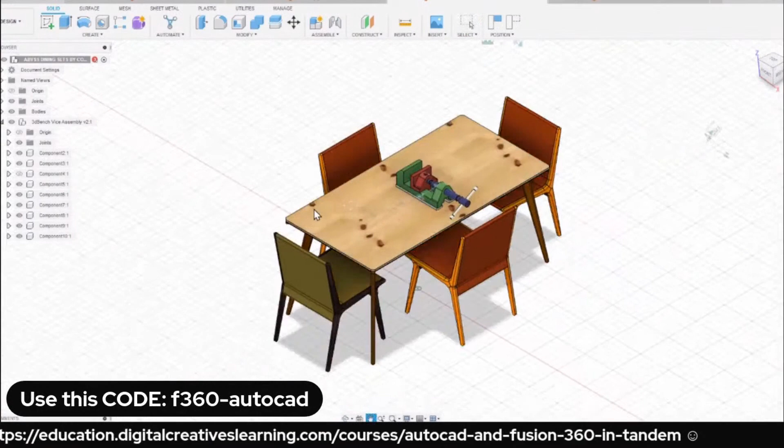So again, lots of possibilities. From here again, I can head back to render, head to scene settings, reposition the sun's location so that the shadow would be at a negative 50 degrees. And from here, I can re-render this.

So again, it depends on the environment, and you can customize. You may upload your own HDR, for those who are familiar with rendering, high dynamic range, right? EXR files, HDR. You can also customize that or input your own, import your own. It's actually here, attach custom environment. I hope you're familiar with sites like, I'm not sure if it's available, HDRI Haven.

HDRI Haven, they have lots of free HDRs that you can utilize. So here it is, HDRs, environments, custom environments. If you're familiar with Maya, another Autodesk software, you can do EXRs. You can import, play around, or do a lot of combinations. You can also bring this if you want more control with textures.

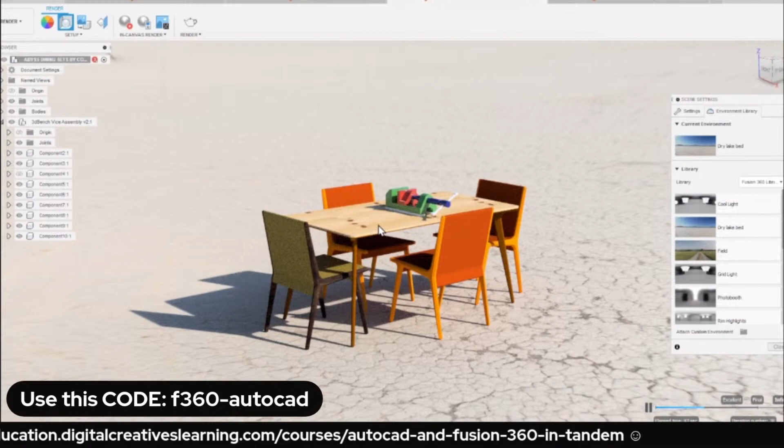Recall we added textures here, like for this tabletop, it's wood texture. But if you want more control or customization, I highly suggest putting these files, importing them into 3ds Max, texturing it using Adobe Substance, and then rendering it using Arnold.